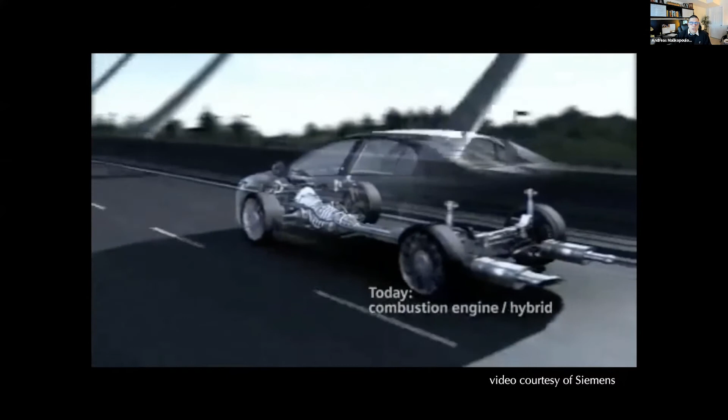We're about to depart from conventional vehicles with internal combustion engines and move on to pure electric vehicles. And this transformation creates several opportunities and challenges.

For example, we need to upgrade the existing infrastructure of our transportation network with fast chargers. We need to develop control technologies that can coordinate the increasing demand for electricity from the vehicles and reduce the load for the power grid.

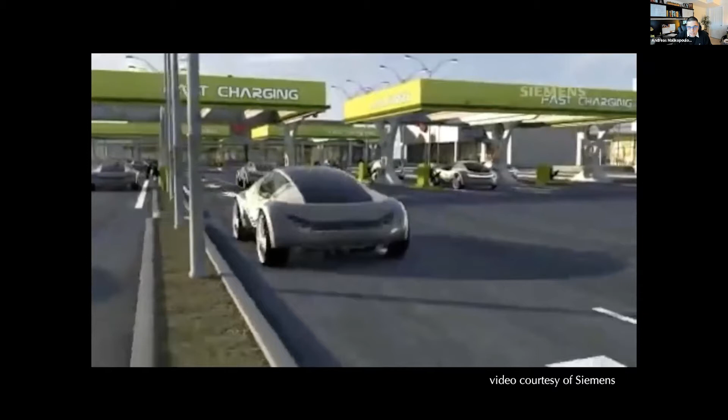We have opportunities to integrate electric vehicles with commercial and residential buildings and create eventually off-grid buildings. On top of that, with the introduction of connected and automated vehicles, we can use the shared information from the vehicles and infrastructure to improve transportation efficiency, reduce congestion, and stop-and-go driving.

So the common theme of these applications is that we use a cyber component, data or shared information, and we use this cyber component to control physical entities. In other words, we have typical cyber-physical systems.

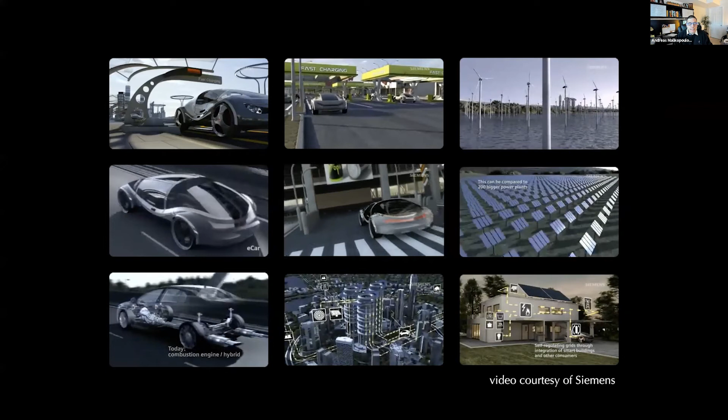Now, somebody might ask why we should be focusing so much on transportation. Well, in 2017, the United States consumed on average 19.96 million barrels of petroleum, and transportation accounted for 71% of that usage. That's enough fuel to fill up the Empire State Building over 2 times per day just to propel vehicles in the United States only.

So you can see the impact of transportation on a global basis on oil displacement and on the environment. With the introduction of connected automated vehicles, which are typical cyber-physical systems, we do have the opportunities to reduce oil displacement, improve transportation efficiency, improve the environment, at least reduce the impact on the environment, and eventually contribute to the health of the planet.

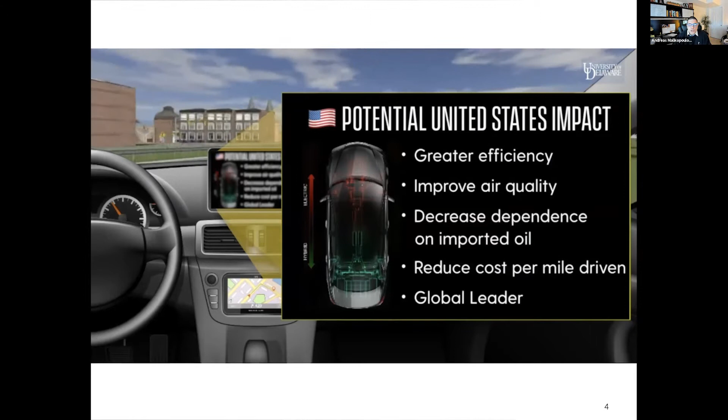So what I plan to do today is to focus on cyber-physical systems related to transportation. And then I'll go through several learning and optimal model-based control approaches that I have worked on over the last several years on emerging mobility systems.

So I'll show you how we can make the engines of vehicles learn how to improve their operation with respect to the driver's driving style. Then I'll talk about how we can develop model-based control approaches to coordinate connected automated vehicles. Through these applications, I will try to highlight some of the challenges that we can encounter using learning or model-based control approaches.

At the end, I will try to convince you that if we can separate what we can control and what we can learn, then we can combine both and address some of these challenges.

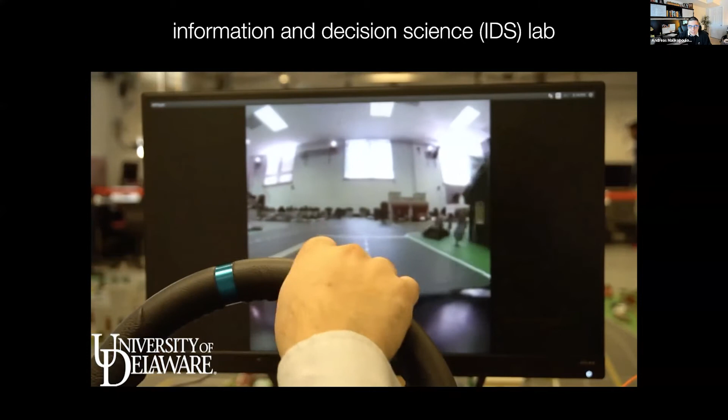We have also integrated driver emulators into our robotic cars, so we can drive them in our city. As you can see here, we have cameras ahead of the car so the student can drive and see what's going on through a monitor.

With this setting, we can have a mixed traffic environment with connected automated vehicles and human-driven vehicles, and then address the in-between and how we can influence human driving behavior through connectivity and automation.

Dealing with a physical city, we encounter several challenges every time. So we thought, why don't we build a digital replica to use in a simulation environment, test our algorithms there first, and then once they become mature, move on to the physical entity.

So we built a digital city, a replica of our scale city, and now we can also use this digital replica with our collaborators. It's available online, so they can test their algorithms, and once the algorithms become mature, they can come to UD and do some physical testing.

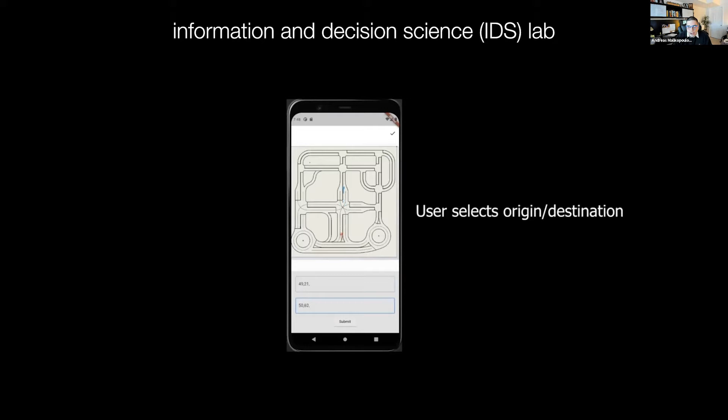More recently, we also developed an app to test shared mobility in our scale city. If somebody visits our lab, they can download this app and request any of the 50 robotic cars to take a ride, a free ride. We don't charge anything at the moment.

With this app, we can prove some concepts that we developed in optimization algorithms for eco-routing approaches, using the model of Uber and Lyft.

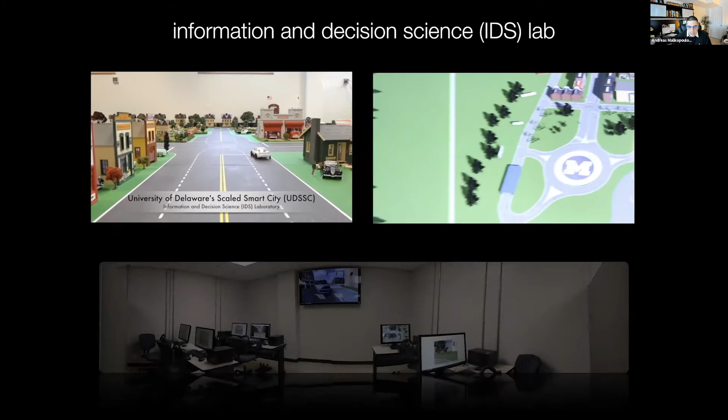We also have a driver simulation testbed that uses commercial software to do some simulations before we move to our scale city. So with this brief introduction, let me get back to our technical discussion.

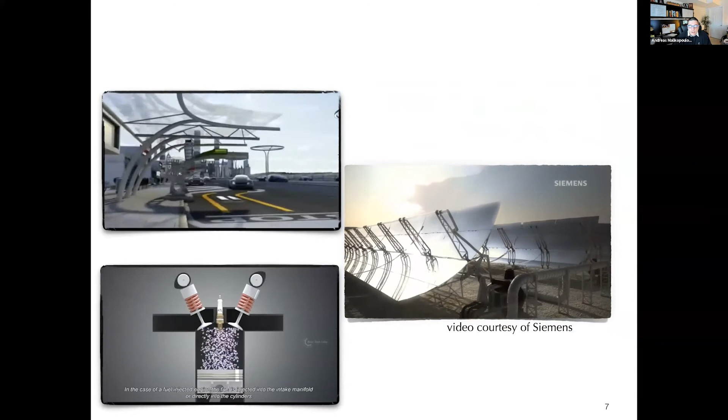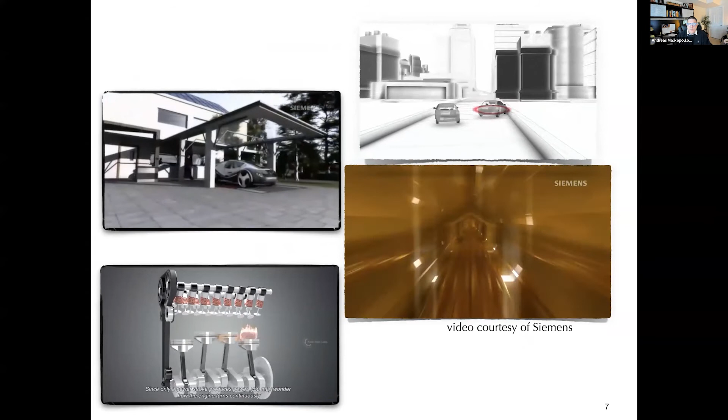As I said, over the years I have worked on several applications in transportation. I started with my dissertation, working on learning algorithms that can make the engine of a vehicle improve its performance while interacting with the driver. Then I moved on to plug-in and hybrid electric vehicles, developing power management control to maximize efficiency. Over the last several years, I've been working on connected automated vehicles and how we can use model-based control and shared information from vehicles to improve transportation efficiency and safety.

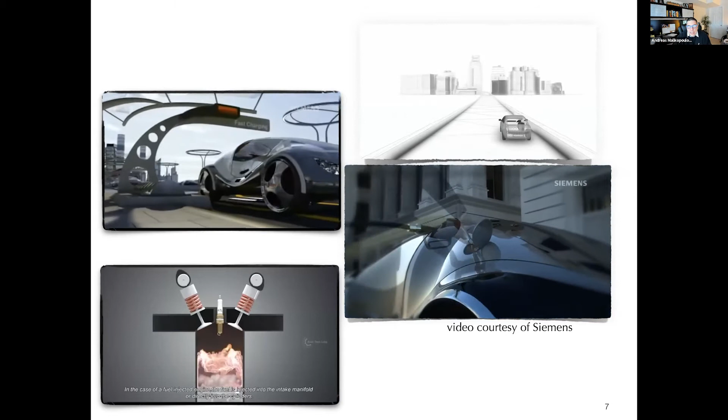So over the next several minutes, I'll tell you my story. I will start with my dissertation research on learning of the engine and go all the way up to today, highlighting all the challenges I've gone through over the years using either learning-based approaches or model-based control approaches.

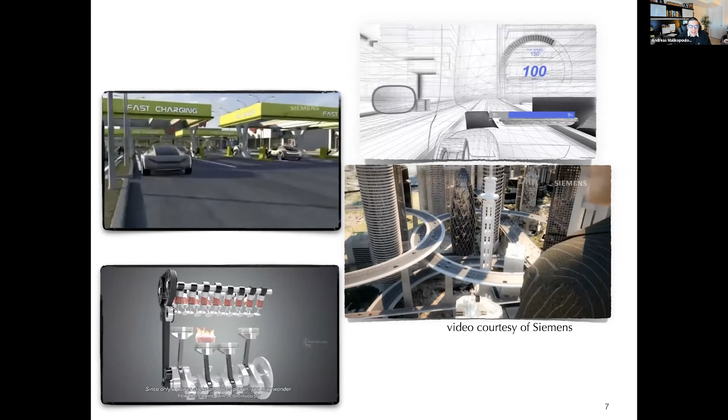I will use these lessons learned over the years to convince you that if we can separate learning and control, we might be better off. So the first chapter of my journey started in 2003, when I arrived in Ann Arbor, Michigan, starting in the winter semester.

So it was December of 2002, and it was about Michigan—Ann Arbor had about 11 inches of snow. So the first thing I had to do was buy long woolen socks. And the second thing I had to do was find a topic for my dissertation that would keep me busy over the next several years.

So I started reading some articles and going through different papers, and I realized there was a common question among several people at that time: they all wondered how we cannot achieve the miles per gallon posted on the window sticker. I thought this was a very interesting question that could keep me busy for the next five years, and I started digging into it.

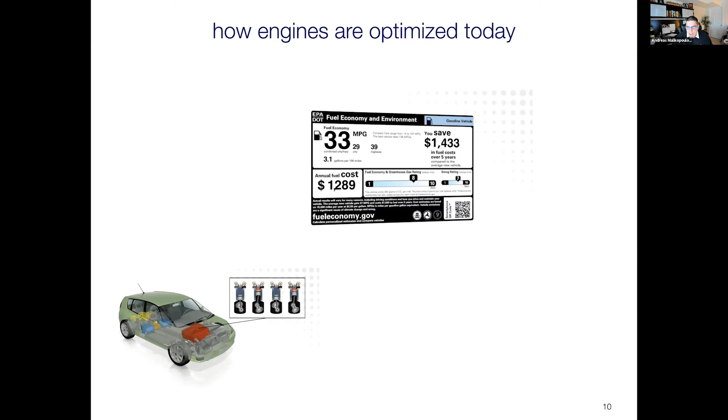So when we buy a vehicle in the US, it comes with a window sticker that gives us the fuel economy estimates for highway driving and city driving. And although we can always achieve the estimates corresponding to highway driving, we can barely achieve those fuel economy estimates for city driving. So let's see why we cannot get the fuel economy estimates when we drive in the city.

To understand engine operation, we need to look at the engine operation domain consisting of engine torque and speed, in conjunction with a brake-specific fuel consumption map, the BSFC map—those contours you see on the plot. The BSFC map gives you the fuel consumption per unit power. The lower the value, the better the fuel economy.

Now, the way OEMs optimize engines today: they take the engine operating domain and discretize it into a finite, usually small, number of steady-state operating points—meaning the engine operates at constant torque and constant speed. Then they compute the optimal values of the controllable variables that exist in the engine, like injection timing, spark timing, VGT, EGR, you name it, with respect to these steady-state operating points. Then they come up with a map and put it into the electronic control unit of the engine.

So as you drive your car and accelerate, as you can see at the top of the plot, the engine jumps from operating point to operating point on the BSFC map, and then interpolates the values of the controllable variables corresponding to the steady-state operating points to optimize the engine.

However, some of my colleagues at Michigan did experimental work at that time and discovered the following: if we operate the engine at constant torque and speed, fuel consumption is steady. This is why we can achieve the fuel economy estimates on highway driving, because on the highway we essentially operate the engine at constant torque and speed. This is also why it's always beneficial to operate your vehicle with cruise control.

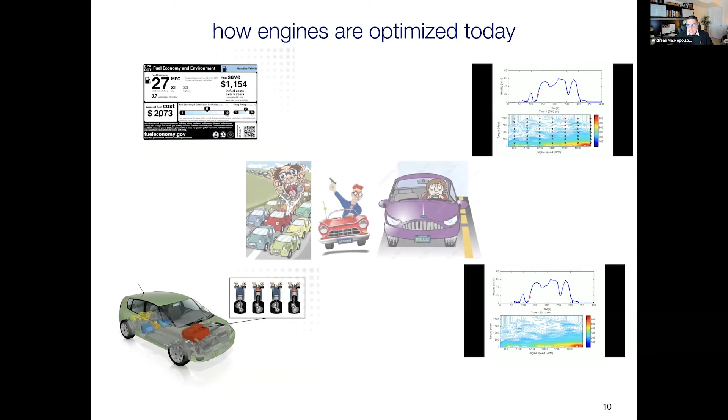Now, to optimize the engine over these transient periods a priori is infeasible, simply because every driver drives differently, so we have an infinite class of driving styles. So what I did in my dissertation was think: instead of focusing on the steady-state operating points, let me focus on the engine operating point transitions.

The natural model to capture this was the controlled Markov chain. So I modeled the engine operation, and the evolution of the operating points, as a controlled Markov chain. I developed a self-learning controller, learning the transition probability matrix and transition cost matrix. Then I formulated the stochastic optimal control problem and derived a look-ahead control policy in real time while the driver drives the vehicle.

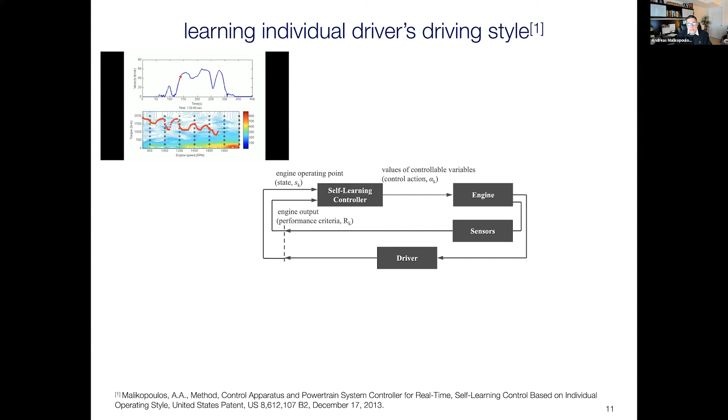So essentially, with this approach, the more you drive the car, the better the fuel economy becomes with respect to your driving style. We did several studies and simulation results, and showed that we can improve fuel economy by at least 8%, just by doing a better calibration of the engine using learning techniques.

I recently heard from the University of Michigan that they have ongoing discussions with a tech giant from Silicon Valley who are leaders in autonomous cars.

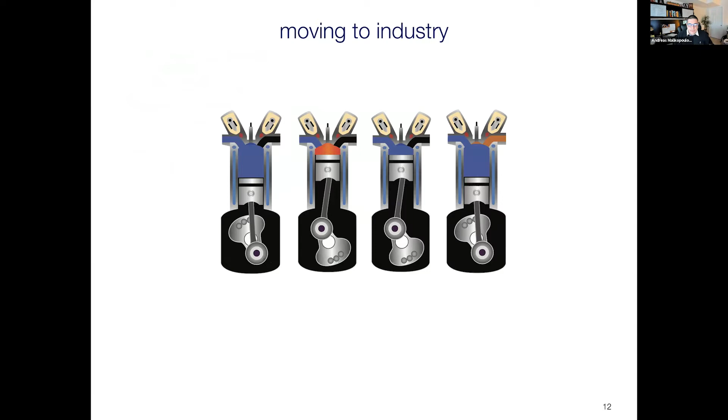So apparently they plan to license this technology and move it on to their own autonomous cars. This project attracted considerable attention at that time and had several discussions with the big three, GM, Chrysler, and Ford. So I eventually ended up working with GM R&D. That was my first job right after graduation.

So when I joined GM, they were working on a new combustion technology, and they wanted to depart from expensive piezoelectric fuel injectors and employ a simple and much less expensive solenoid fuel injector. But with a solenoid fuel injector, you have injector-to-injector variation.

These are four solenoid fuel injector characteristic curves, and you can see the deviation between injector to injector at two different cylinder pressures.

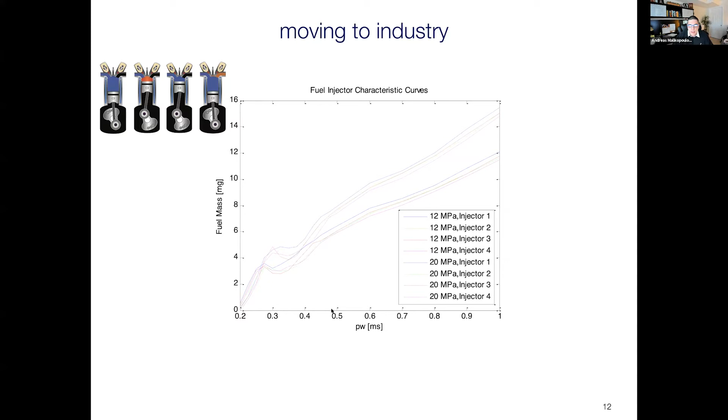So with that technology, we wanted to have precise injections at the small fuel mass, so multiple fuel injections essentially. We needed to make sure that we have very precise injections when we want to inject like 4 to 6 milligrams. So my job was to come up with a learning model that can learn this curve.

You might think that this is a kind of straightforward project. You can definitely get data and come up with a polynomial meta model that can give you this. However, the challenge in the engine is that I don't have measurement. I cannot measure the amount of fuel injected from the fuel injector.

So I had to combine several supervised learning techniques using data that I have offline from fuel injectors with real-time adaptive control in order to learn the fuel injector characteristic curve in real time in a few cycles.

So with this approach, essentially, I was able to learn the curves for small injections with just a few cycles, which means in a few milliseconds. On top of that, the scheme was able to essentially also capture the day-to-day variation due to the environmental conditions. So that was another project that I used learning techniques, a combination of learning and adaptive control techniques.

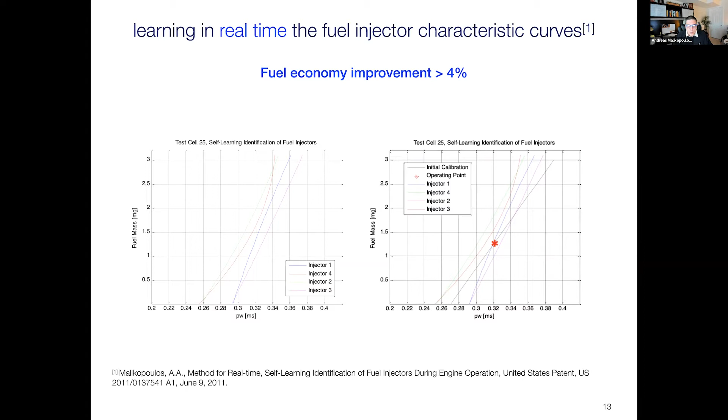And this approach resulted in about 4% improvement in fuel consumption, which is quite significant for engines. So that was around 2010.

And then we have the 2010 volcano eruption in Iceland. And you might wonder, how is this related to this discussion? Well, believe it or not, this volcano eruption changed my career path and also the research direction.

In 2010, I was invited to participate in the 2010 German-American Frontiers Symposium hosted by National Academy of Engineering. And due to the volcano eruption, several speakers from Germany could not make it to the US. That was hosted by Oak Ridge National Lab in Tennessee.

So the organizers asked me to give a seminar, and there were several folks from Oak Ridge in the audience. One thing led to another, and I ended up working for Oak Ridge National Lab and moving on to hybrid electric vehicles and plug-in electric vehicles on my research.

So when I joined Oak Ridge, my first project was to develop an optimal power management control algorithm that can maximize the efficiency of hybrid and plug-in hybrid electric vehicles. So let's see what is a hybrid electric vehicle.

In a hybrid electric vehicle, in addition to the engine, we have a motor, generator, and battery that can power the vehicle either separately or in combination. So essentially, with the hybrid electric vehicles, we can deliver the power demanded by the drivers either through the engine or through the motor, or by combining engine and the motor.

When we use the motor, we deplete the battery. So we need to make the engine operate the generator and charge the battery. So there is a lot of decision-making process going on while the driver drives the vehicle.

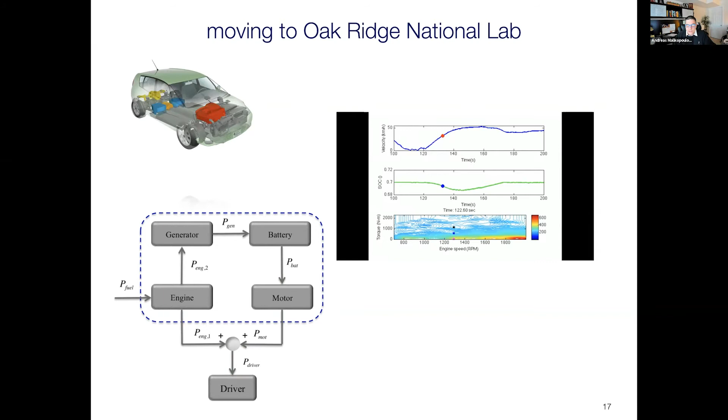And just to give you a flavor of this problem, the first thing that we need to do is to identify the feasible state and control action pairs for each of the subsystems: engine, motor, generator, and the battery. And then we formulate an optimal control problem when we want to maximize the efficiency of the entire system or minimize the cost of the entire system.

And we use the long-run average cost per unit time just because we want to optimize the operation of the hybrid electric vehicle in the long term, as the driver drives the vehicle for days or for months.

Now, to solve this problem, there are two major challenges. First, you can't really solve this problem on board the vehicle. On a commercial vehicle, you can barely inverse a 4x4 matrix. You don't have the computational power to do that.

The second challenge is that even if you solve this problem, the optimal control strategy will be optimal for one driver only.

If any other driver drives the vehicle, then you have different results. So to address these problems, I reformulated the problem.

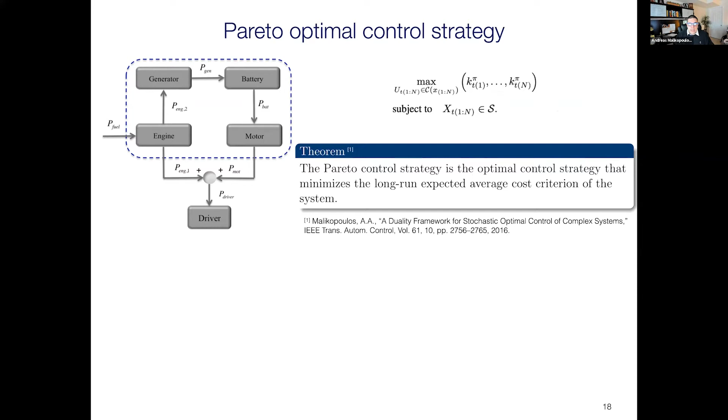I reformulated the problem as a multi-objective maximization problem, where I was trying to maximize the efficiency of the engine, motor, generator, and the battery. Then I solved this problem offline for every different realization of the state of the system, and I computed the Pareto optimal point for each of these different realizations. Then I came up with a map and operated the vehicle using this map, interpolating this value, essentially operating the system under this Pareto optimal point every time.

I showed that if you construct this Pareto control strategy, as I call it, then this is equivalent to the optimal control strategy that can minimize the long run expected average cost criterion.

I did several simulations to prove these concepts. To solve this and derive the dynamic programming solution, I used Q-learning. I had the model of a hybrid electric vehicle, and I ran it over the same driving cycle again and again using Q-learning.

Once I learned the optimal control strategy, I compared it with the Pareto control strategy that I was able to derive in real time, and I saw that I got the same results.

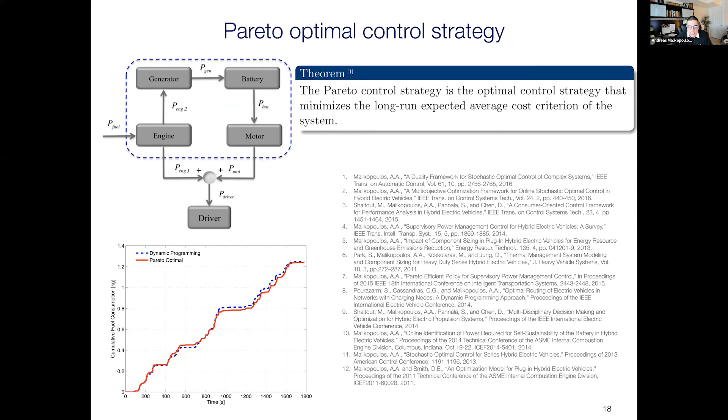More recently, we applied this approach, developed several years ago, in an ARPA NextCar project, which I'll talk about in detail. We had an Audi A3 plug-in hybrid electric vehicle, and the idea was to improve its efficiency. We used this approach and showed we can have at least 12% improvement over the Audi's power controller.

Our industrial partner, Bosch, got really surprised with this result - it seemed too good to be true. So they did a statistical analysis, comparing the engine operating points from the Audi's controller with the engine operating points from the Pareto optimal solution, and showed that statistically, we operate the engine in the more efficient BSFC regimes.

We talked about the BSFC earlier on - it's the fuel consumption per unit power. That was the reason we got these significant improvements.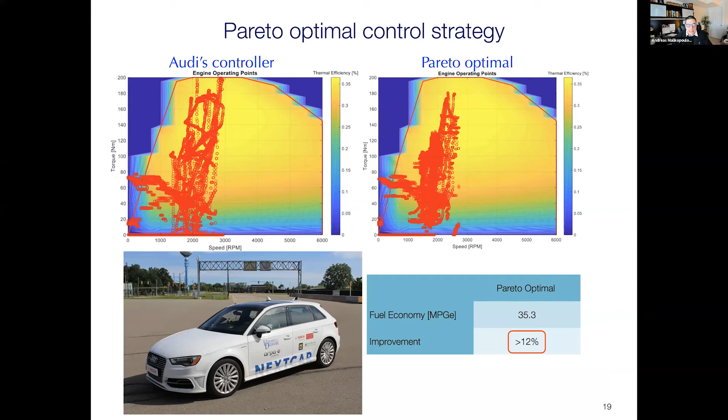That was the second stage of my career, working on hybrid electric vehicles and plug-in hybrid electric vehicles, still at Oak Ridge. At that time, I saw opportunities with connected automated vehicles. I thought that using shared information from vehicles, we can essentially take this information and optimize the powertrain or optimize energy, the transportation efficiency.

Essentially, what I had in mind was how we can use this information to coordinate vehicles at intersections, merging roadways, and avoid stop-and-go driving, then have benefits in energy indirectly.

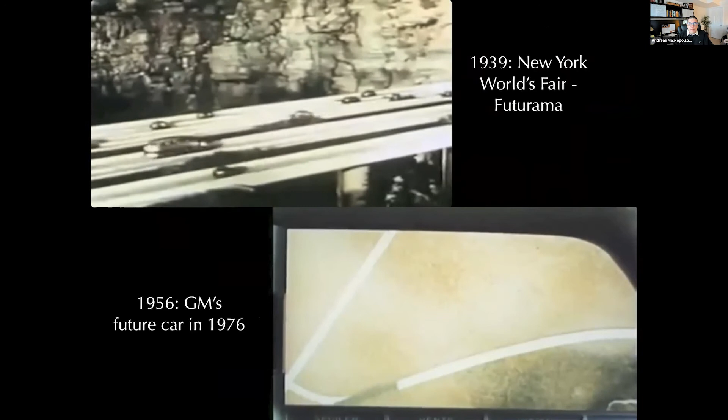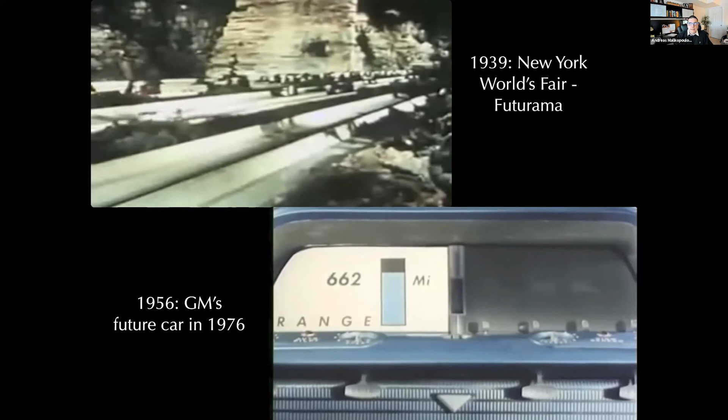If you think about it, these are not new ideas. The first time automation sort of appeared in the community was in 1939, in the Futurama, where they had a model of the world into the future. A big sector of this model was devoted to transportation, and they envisioned a fully automated highway system with cars. Imagine in 1939 having a vision like this.

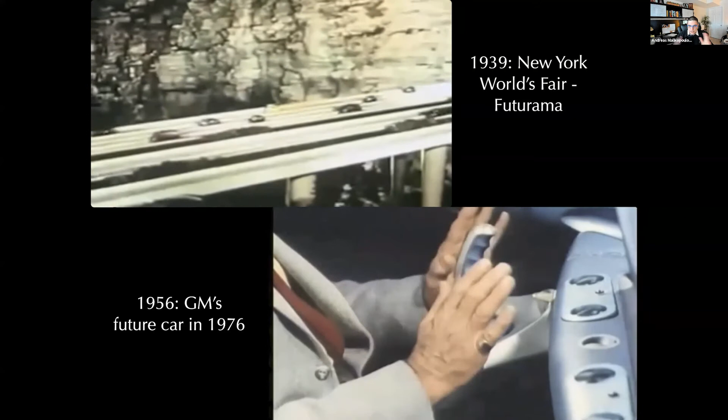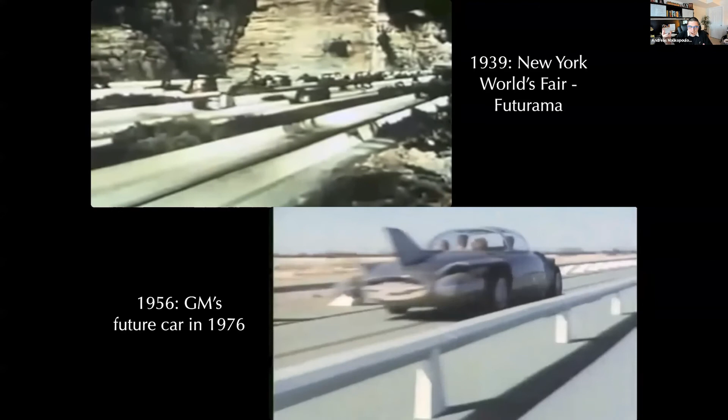In 1956, GM featured another car 20 years into the future, showcasing the first concept of a self-driving car. They had a family driving to Chicago, envisioning a fully autonomous car, and while the car drives on its own, the family enjoys a bunch of luxury stuff - the dad fires up a cigar, they have ice cream and drinks in the car. That was showcasing the potential impact of cars driving on their own.

So these are not new ideas. The fact that over the last 83 years we still haven't been able to get there speaks to how hard this problem is.

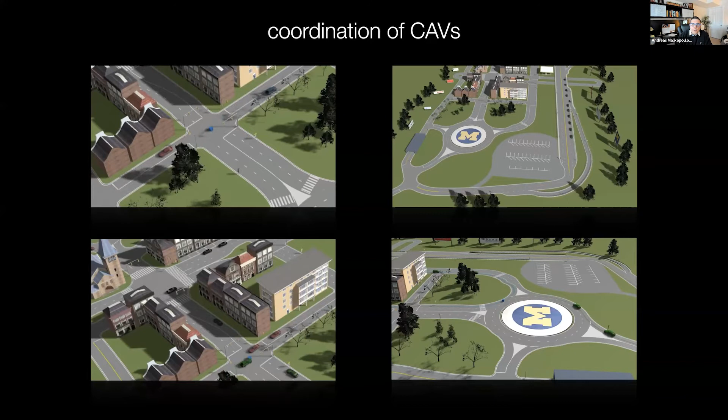So long story short, over the last several years we developed control algorithms that can use the shared information from vehicles and coordinate them in intersections, in merging roadways, in roundabouts, and improve transportation efficiency. Let me take the next several minutes to give you a flavor of how we can model this problem and address it.

I'm going to use an intersection as a reference, but this approach can be used for any transportation or traffic scenario, like merging roadways, roundabouts, you name it. So let's assume we have 4 connected automated vehicles approaching an intersection without traffic lights. If the vehicles keep cruising, they will potentially have a conflict.

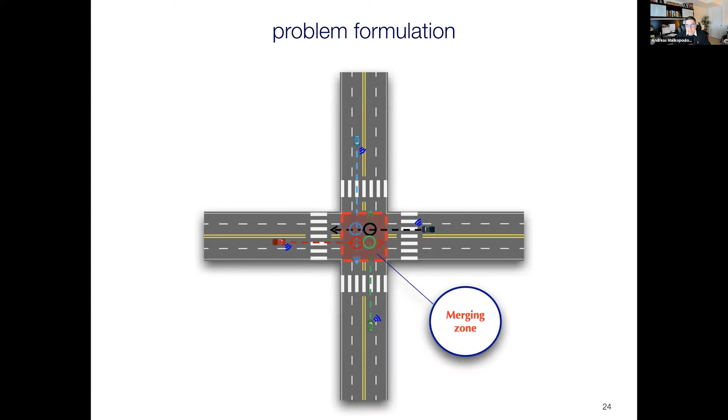The area at the center of the intersection where vehicles can have a potential conflict is called the merging zone. We then define the control zone, which is outside the merging zone, and this is the area where vehicles can communicate with each other and exchange information.

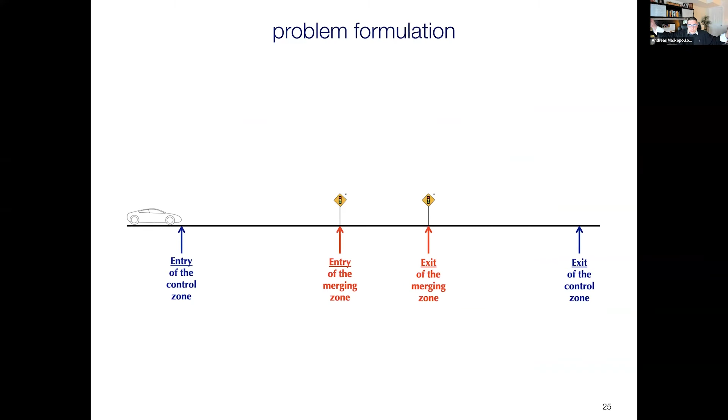So the problem here is once the vehicles enter the control zone, they need to exchange information and coordinate so that they can cross the intersection without stop-and-go driving and without collision. The idea is that once the vehicle enters the control zone, first identify the time it will enter the merging zone, the time it will exit the merging zone, and the time it will exit the control zone. Once the vehicle identifies these times, the next task is to derive its optimal acceleration and deceleration in terms of fuel consumption so it can cross the intersection.

So if you think about it, we address two problems. In the upper level problem, we identify the times for the vehicles to cross the intersection, and this is essentially a throughput maximization problem. In the lower level problem, we derive the optimal acceleration of the vehicle for these times, which will minimize the energy consumption of each vehicle.

So now what I'm going to do in the next few minutes is start with the analytical solution of the low-level problem and show you how we can use this solution to formulate a new problem that can solve both problems at the same time. Why do we need to do that? The reason is that the low-level solution can become very tedious because it's a constrained optimization problem, so tedious that you cannot really solve it online on board the vehicle. So we need to bypass this and have the same solution but with a different approach.

In our exposition, we model each vehicle as a double integrator. P is the position of the vehicle starting at the entry of the control zone. V is the speed of the vehicle. U is the control input, acceleration or deceleration. And then we add the distance S_i, which is the distance of each vehicle i from the preceding vehicle k. This corresponds to the proximity sensor of the vehicle, which measures the distance from your preceding vehicle.

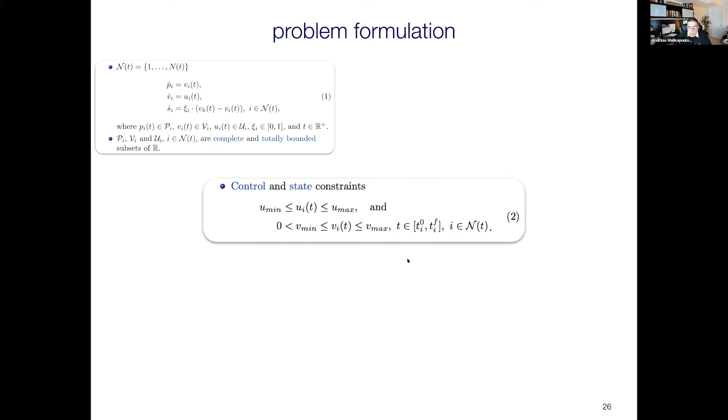Then the next step is to identify the bounds of my control input and my state. For example, each vehicle has a maximum acceleration and deceleration capability, and we need to incorporate this into our modeling framework. For each time T_i0 that the vehicle enters the control zone until the time T_if that the vehicle exits the control zone, we impose a speed limit within the control zone for each vehicle. Then we need to make sure that we satisfy safety constraints.

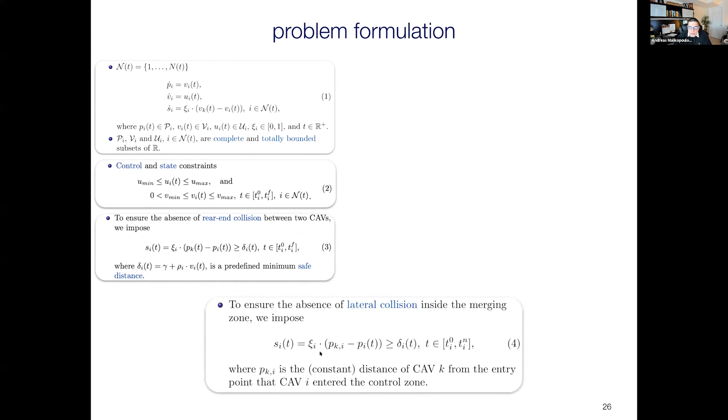The first safety constraint is the rear-end collision constraint, where we require that the distance of each vehicle i from the preceding vehicle k is always bigger than or equal to a safe distance delta_i, which is also a function of speed, in the sense that the higher the speed, the higher the distance we need to maintain from the preceding vehicle. Finally, we make sure that we don't have a lateral collision inside the merging zone.

Once we get this done, the next step is to formulate our problem, which is minimizing the optimal L2 norm of the control input of the vehicle from T_i0, when the vehicle enters the control zone, until T_if, when the vehicle exits the control zone, subject to all the boundary conditions, dynamics, and the safety, state and control constraints.

Now, somebody might argue here and say, hey, you told us that you're going to minimize energy consumption, but you're minimizing the L2 norm of the control input. How are these two related? Well, if you remember from the first part of the talk, by minimizing transient engine operation, essentially we minimize fuel consumption. So this is essentially what we're trying to do here. We're trying to minimize transient engine operation and give the desired speed to the driver with minimal acceleration, minimal deceleration. So this is how we can get indirect benefits in fuel consumption.

Now, to solve this problem, we can use Hamiltonian analysis. And if none of the state, control, or safety constraints become active, then we have a very nice closed form analytical solution where the optimal control input is a linear and affine polynomial function with respect to t. The optimal speed of the vehicle is a nice quadratic polynomial function, and the optimal position of the vehicle is a cubic polynomial function of time. Now, A, C, D, and E are constants of integration that can be computed easily from the initial and final conditions.

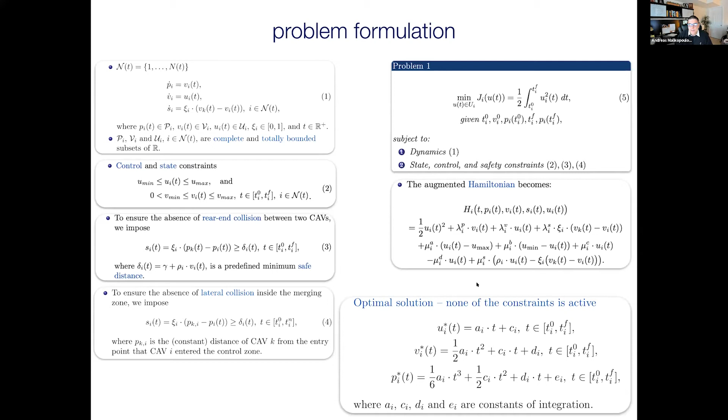However, if any of the state, control, or safety constraints become active, then things get complicated. Just to outline the idea of this complication, let's assume that none of the constraints become active from the time TI naught, when the vehicle enters the control zone, until the time TIF, when the vehicle exits the control zone. In this case, we have the very nice closed form analytical solution that I just showed you before, which can be implemented in real time on board the vehicle.

However, if any of the state, control, or safety constraints become active, then what we need to do is piece the unconstrained and constrained arcs together to satisfy the Euler-Lagrange equations along with the boundary conditions of the system. And then we end up with a set of algebraic nonlinear equations that we can solve on board the vehicle to find the junction points T1 and T2 along with the constants of integration.

Essentially, this implies that we can no longer hope for any closed form analytical solution. We seek numerical solutions like steepest descent and so forth, which means that we cannot really solve this problem on board the vehicle. And even if we get a solution, another constraint might become active, so we need to repeat this process again.

Just to give you a flavor of the complexity, let's consider that we have the rear-end safety constraint, Ni of t, x of t. If this becomes active, it causes discontinuities in the influence function of my Hamiltonian analysis, which means that to address these discontinuities, I need to adjoin the partial derivative of my rear-end safety constraint with respect to the state of the system by a set of Lagrange multipliers and come up with a system of nonlinear algebraic equations that I need to solve simultaneously. So this is impossible to solve on board the vehicle.

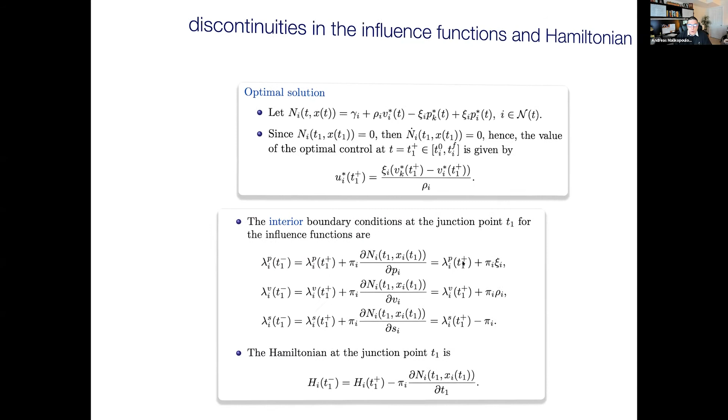Essentially, the idea is that if I can have my optimal unconstrained solution, which is a nice closed form analytical solution, without activating any of the state, control, or safety constraints, I would be happy, because I can solve this problem online. So how can I get this solution eventually?

First of all, we start with a cubic polynomial of the unconstrained case. This is a nice polynomial that we can get if none of the state, control, or safety constraints become active. Now, this polynomial is active between Ti naught and TIF, which means from the time that the vehicle enters the control zone until the time the vehicle exits the control zone.

Now, if you observe this polynomial, we can make three observations. First, this is a real valued function. Second, this is differentiable. And third, this is strictly increasing, which means that this is a one-to-one function, which means that the inverse of this function exists. We call it the inverse time trajectory of the system. To compute the inverse of this cubic polynomial, you can use Cardano's method. This is a pretty straightforward way to find the inverse function. Now, if you look at the time trajectory, this is the inverse of this polynomial.

The time trajectory gives you the position of the vehicle within the control zone at different times. If we evaluate this time trajectory at the exit of the control zone, then I end up with a function with respect to phi, and I can use the phi's to change the shape of my time trajectory, which means I can use the phi's to minimize the time that my vehicle exits the control zone.

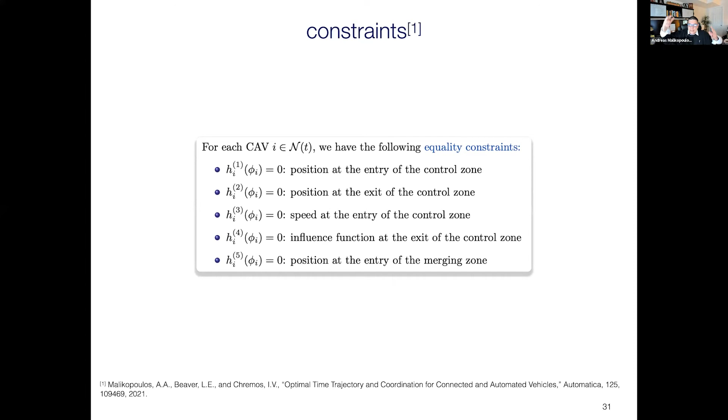At the same time, I don't want to activate any of the state and control constraints. So when I derive this time trajectory, I don't want to activate my maximum and minimum speed limits or the maximum and minimum control inputs, and I want to make sure I do not activate any of the safety constraints.

Given this framework, I can formulate my problem as minimizing the time trajectory of the vehicle evaluated at the exit of the control zone, subject to my initial and final conditions and all my inequality constraints. At the same time, I allow my vehicle to explore other lanes by creating the occupancy set of each lane and making sure I don't have any conflicts in any other lane.

Now, to solve this problem, the question is, can I solve it in real time? It turns out that the objective function, the time trajectory evaluated at the exit of the control zone, is a convex function, and all the equality and inequality constraints are affine convex functions. This means that if I apply Slater's condition, I can show there is no duality gap in this problem formulation, which means we can solve this problem in real time.

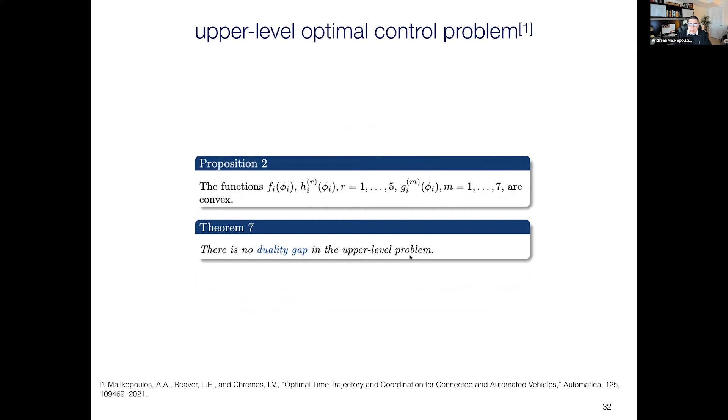So just to give you a flavor of the results of this framework, we have applied this and variations of it in different scenarios. This is one of the examples we use in our scale city. You can see the cars trying to cross the intersection without stop-and-go driving, by deriving the optimal control input at the entry of the control zone.

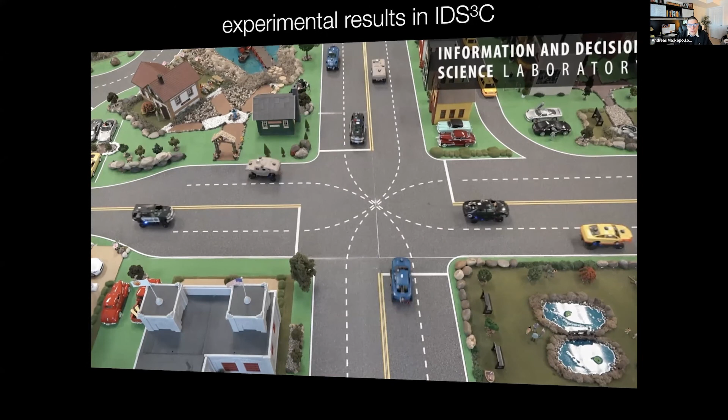We have also implemented this in a corridor, including an intersection, merging roadway, and roundabout. You can see how the cars, by the time they get into the control zone, derive the optimal control input, and they can cross all these conflict points without stop-and-go driving.

We also implemented this in our demo vehicle. This is, as I said before, an ARPA-E project, Next Car. We completed this program last December. The objective was to use connectivity and automation to improve the efficiency of the Audi by 20%. The project was led by University of Delaware in collaboration with Bosch, Boston University, University of Michigan, and Oak Ridge National Lab. We did several field testing in M-City at the University of Michigan.

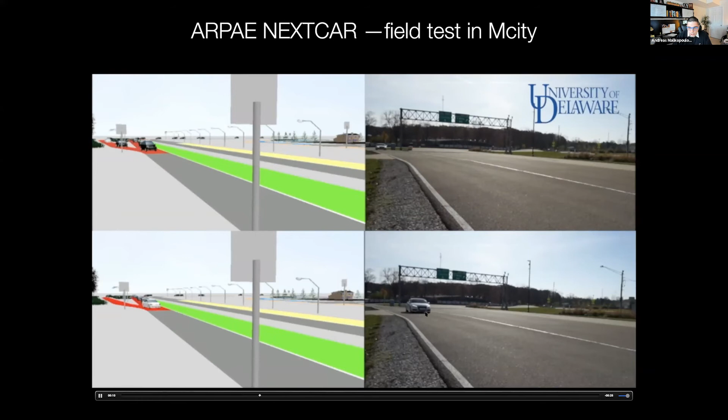What you will see here is the Audi in the field in M-City, interacting with a bunch of virtual vehicles - those are the black vehicles you can see on the left. On the top is the baseline scenario without connectivity and automation. On the bottom is the scenario with connectivity and automation. As the Audi approaches the merging zone, it coordinates with the other virtual vehicles and gets into the merging zone without stop-and-go driving. On the top, in the baseline scenario, the Audi has a virtual vehicle ahead, so it has to wait until that vehicle departs in order to get into the merging zone. This is the typical scenario we encounter today when we have a ramp or a yield sign. So now the Audi can get into the merging zone.

We also did several vehicle-in-the-loop testing at Bosch Farmington Hills facilities with our collaborators. We essentially put the car on a chassis dyno, and the car drove through a virtual environment interacting with other vehicles. On the left is the baseline scenario without connectivity and automation. On the right is the scenario when all the cars are connected and automated. You can see how we smoothed out the speed profile of the vehicle since we eliminated the stop-and-go driving. Now we have stretched the speed profile essentially into freeway driving. So the Audi, when it arrives in the merging roadway, can coordinate and cross the merging roadway, and so forth. This smoothing out of the speed profile resulted in benefits ranging from 14% all the way to 35% improvement.

So just to summarize what we've discussed so far: we talked about model-based control approaches, and showed that we cannot always facilitate optimal solutions with performance guarantees, because of the discrepancy between the model and the actual system. Recall, I used the double integrator model to capture the dynamics of these vehicles, and then I had to use a PID controller to capture this discrepancy. In supervised learning, on the other hand, you cannot always facilitate robust solutions with performance guarantees using offline data only. When I worked with a fuel injector characteristic curve, I had to combine offline data with real-time control in order to address this drawback.

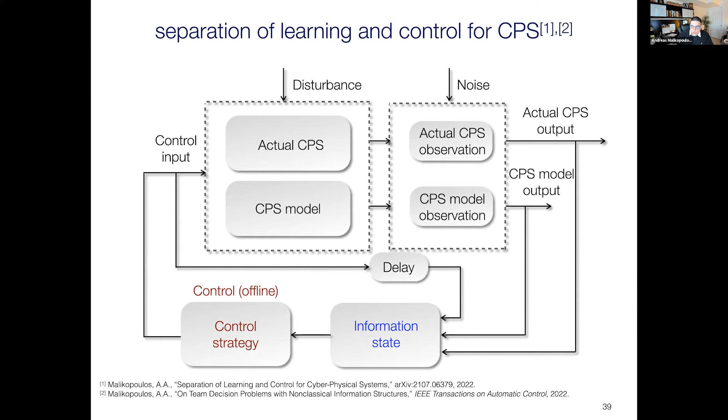So if I use this information state offline to derive an optimal control strategy using only the model I have available, I won't have the information of my actual CPS. This means I'm going to parameterize the control strategy I derive offline with respect to the different realizations of the state of my actual CPS.

What's the idea here? Once I use my model to derive the optimal control strategy using the information state, I need to parameterize my optimal control strategy with respect to the realization of the state of my actual CPS. Then I go back to my initial system and apply this control strategy to my actual CPS and CPS model, and as I start collecting data, I'm learning the information state.

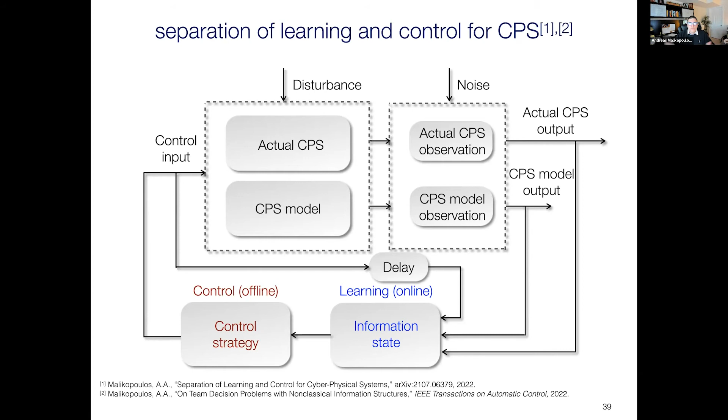What I'm going to show you in a while is that once we learn the information state online, the optimal control strategy we derived offline becomes optimal for the actual CPS. Now let's get into more technical details to see this concept.

Let's assume we have an actual CPS, a cyber-physical system with decentralized information structure, meaning we have a system of systems. For example, imagine a fleet, a number of connected automated vehicles trying to cross the intersection. XT hat is the state of the system, WT is the disturbance, and UTK is the control of each of the subsystems.

UTK is the control input of each individual vehicle, acceleration or deceleration. XT is the state of my system, position of the vehicle, and speed. XT hat and WT are random variables defined in an appropriate probability space.

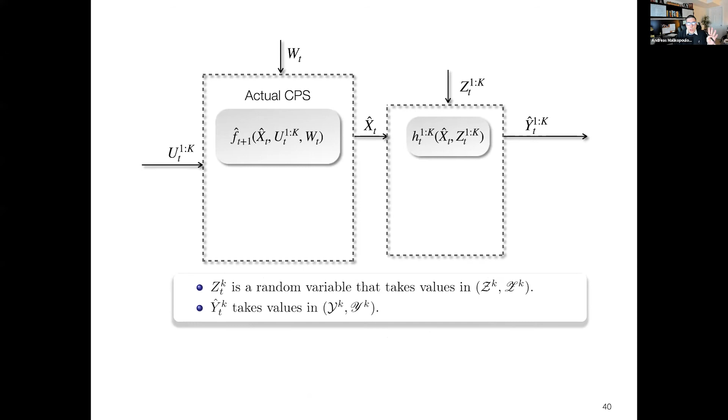For each of these subsystems, we have a noisy observation. Imagine every single CAV can observe the state of the system with some noise, because there's noise when measuring the distance from the preceding vehicle, or error in the information about the position of other vehicles, and so on. Now we have the actual CPS, and the problem is to minimize the expected total cost of this system.

In this cost we have CT, some measurable cost functions. Imagine this is the travel time of each of these vehicles, or fuel consumption, or a combination. Now, to solve this problem, as we discussed in the last chapter with connected automated vehicles, we can't really do that.

Because we don't have the model - we don't know the dynamics of our actual vehicles, so we will use models. We use the double integrator to do that. So we assume we also have the double integrators, the CPS model, and we operate the actual CPS, the actual vehicles, and the double integrator models at the same time.

Then the idea here is to establish a new information state for this system. This information state is the joint probability distribution of XT, the state of my model, and the state of my actual CPS, given all the data of my model, which is the information structure of the model.

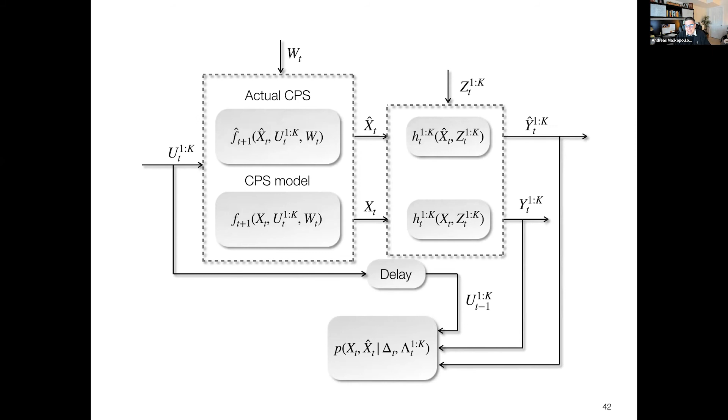Now what is delta t? What is the information structure of the model, delta t and lambda t? Remember I mentioned this is a decentralized system with a decentralized information structure, which means there is an n-step delay information.

For example, if any of these subsystems has an observation or an action, this observation and action becomes known to any other system after n time steps. So there's some delay, and this is typical in emerging mobility systems or other CPS applications. For example, in cars, when we exchange information, there's some delay between this information.

So delta t is the common information among all the subsystems, all the vehicles, and lambda TK is the private information of each of these vehicles. Delta t and lambda t together form the information structure of my system.

So I'm going to use this information state and go offline, pick up the model I have, and solve this problem offline to derive the optimal control strategy. Since this information state is a function of the state of my actual CPS, and I do this offline, I don't have any information about my actual state, which means when I derive the control strategy offline, it will be parameterized with respect to any realization of the state of my actual CPS.

Now, if we take a step back for a moment and think about what I have done so far, there's nothing new.

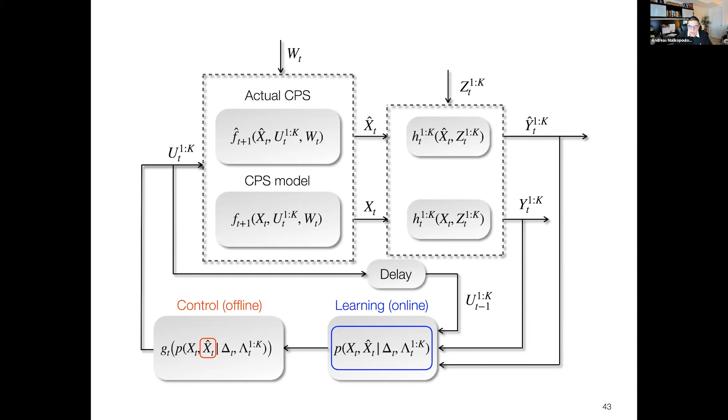However, before I show you this result, I need to make sure I can separate my control and learning, so the information state does not depend on the control strategy. The first result shows that the joint probability distribution of the state of my model and the actual state, given all the data, is indeed an information state, the evolution of which does not depend on the control strategy.

It means that every time my information state evolves, this does not depend on the choice of the control strategy, but on the realization of the random variables of my system, which implies that I can separate my state estimation from my control design.

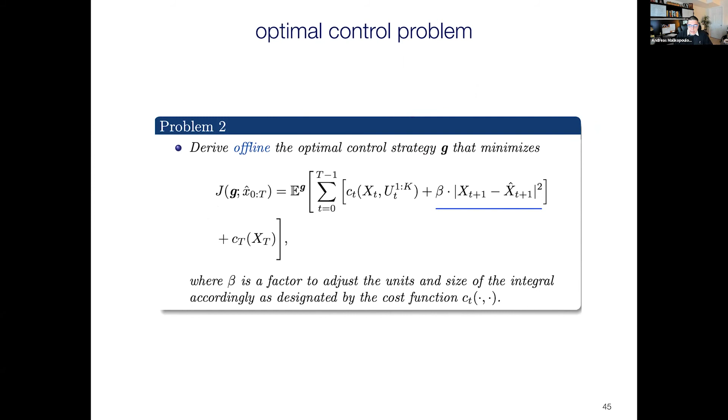Using these results, I can go back to the problem I wanted to solve at the beginning: minimize the expected total cost of the actual CPS. Instead, using my new information state, I solve a problem where I've added a penalty function for any discrepancy between the state of my model and the state of my actual CPS. The following result says that once I solve this problem, the optimal control strategy is also optimal for my initial problem of my actual CPS.

Just to give you the intuition, not going through the proof, we solve this problem offline using the information state of my system. When I solve this, for each realization of the state of my model, I derive an optimal control action parameterized with respect to different realizations of the state of my actual CPS. So instead of having a single value of the control action UT, I have a vector of values corresponding to different realizations of my actual CPS.

Now, when I apply this to my actual CPS and the model, and start learning the information state, once I learn it, I'm picking control actions that yield realizations of my actual CPS that minimize this cost. Eventually, the two control strategies become the same.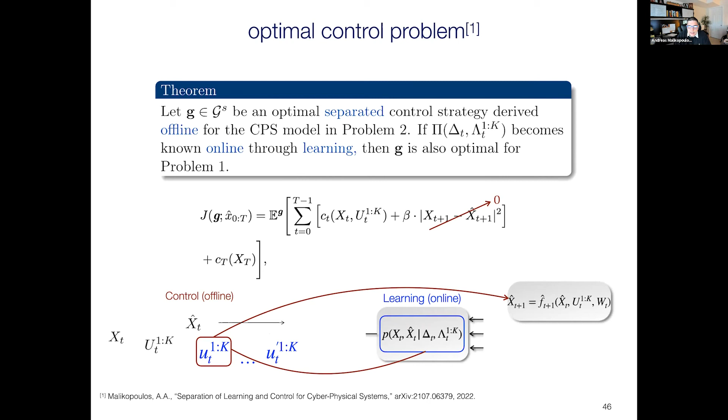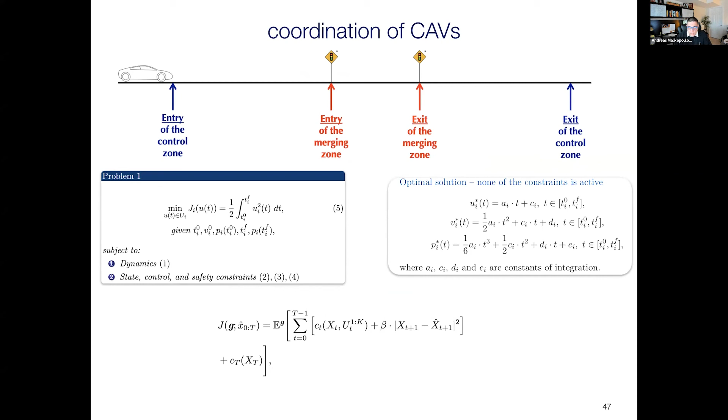As we speak, we are applying this framework to the problem of coordination of vehicles in specific scenarios. If you remember, that was the initial cost function I wanted to use, and it resulted in a nice closed form analytical solution. What we're trying to do now is enhance this initial problem with a new cost function and come up with a parameterized control strategy that we can learn online.

We hope this approach can be applied to several CPS applications with a decentralized information structure, where a large volume of data is added to the system gradually rather than altogether in advance. In these particular problems, we face several challenges using either learning or model-based control approaches, so we believe this approach can help bridge this gap.

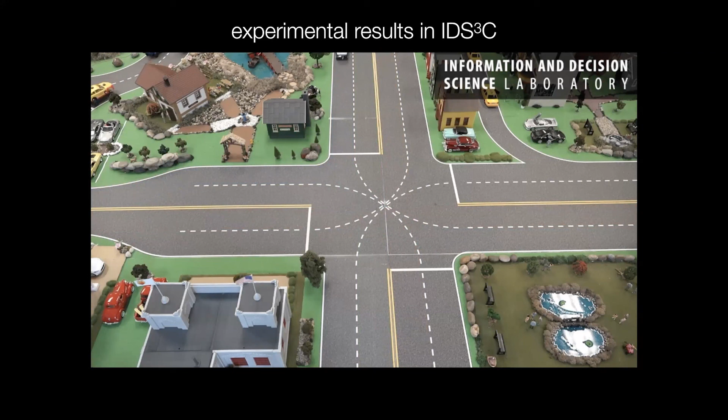Since we have no other question yet here, I would like to ask one question, Andreas. This is a little bit a high-level question, and I think you can elaborate here a little bit more. So you showed that we can solve the intersection with low energy and with high throughput, right?

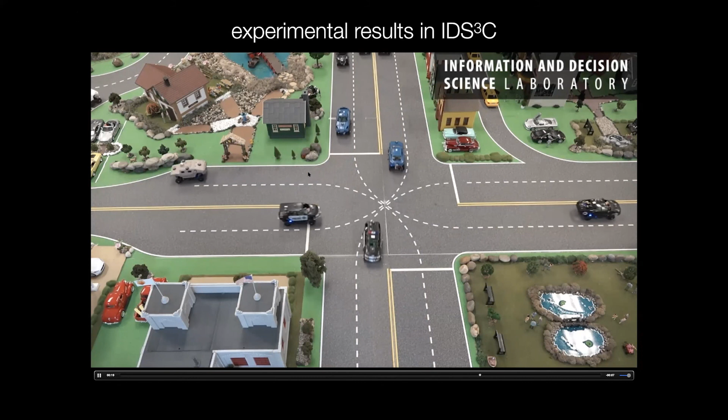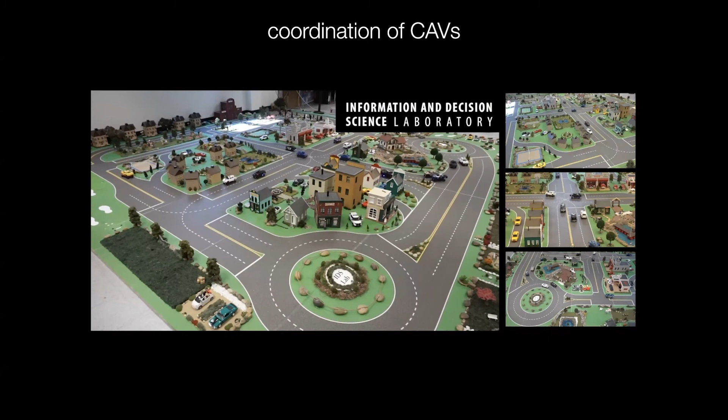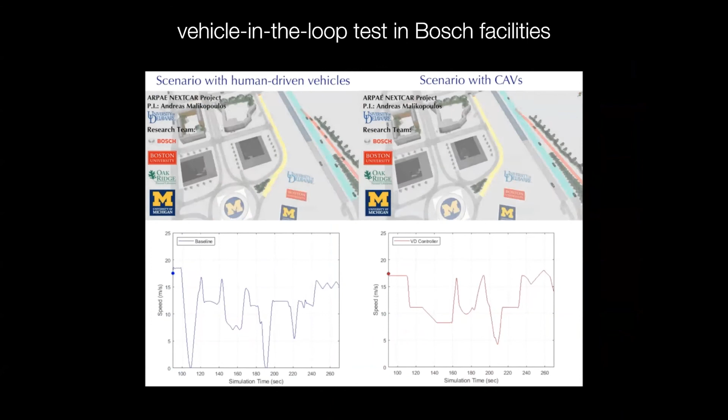And in the future, actually what we see here in the setup, we have a lot of autonomous cars, and the development right now of autonomous cars like perception, planning, control to make the cars drive completely free without any high level steering or something like that. So when you look at your research and you showed us the controller you created, can you elaborate where the most impact comes from? Is it the path that the car is then planning? Is it the velocity that the car is planning? Is it the final controller, the overall controller setup? Or is it even the behavior the car is planning? Right? So perhaps just elaborate a little bit more where you think finally it comes down to this point where you figured out in your research that creates the impact?

Great question. Thank you for asking this question. You are absolutely correct. We dig into this question for quite some time to understand where these benefits are coming from.

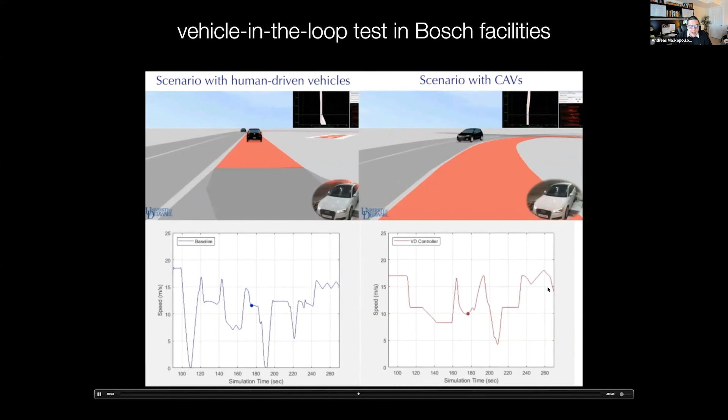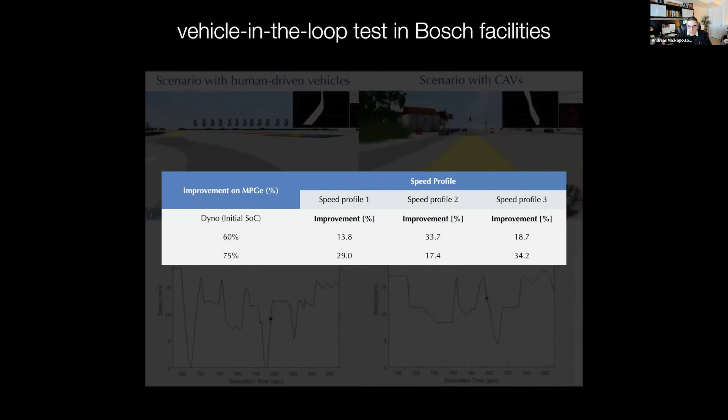Yeah, and to help me answer this question, I'm showing you this video. On the left, this is the baseline scenario, what we have today in our transportation network: no connectivity, no automation. And then we have to stop on stop signs, on traffic signals, on merging roadways. This is the speed profile of the vehicle with stop and go driving. On the right, this is the utopian scenario, something that I think we're going to have to wait until we see it realized in our transportation network. But you can see how we have smoothed out the speed profile. And given this, we have benefits ranging from 13 all the way to 34%.

So I wonder, where are these benefits coming from? I did a very simple exercise. I went to my car and I checked the window sticker of my car, and it says you have 35 miles per gallon for highway driving and 27 miles per gallon for city driving. And I compared the difference. This is about the same range, 25 to 35%. If you do the same exercise for your car, you will see the difference is about that range. It means that once you stretch the speed profile of the vehicle and make it freeway driving, this is where all the benefits are coming from.

Of course, in this particular ARPAE project, we also did powertrain optimization. So on top of the communication and smoothing out the traffic flow, we did better power management control on the powertrain of the vehicle, and we were able to get about 12% improvement. This is in addition, but the majority of the benefits is coming from smoothing out the traffic, the speed profile of the vehicle. If ideally we could leave home and go to our final destination without stop and go driving, without coming to a full stop whatsoever, that would be the ideal scenario.

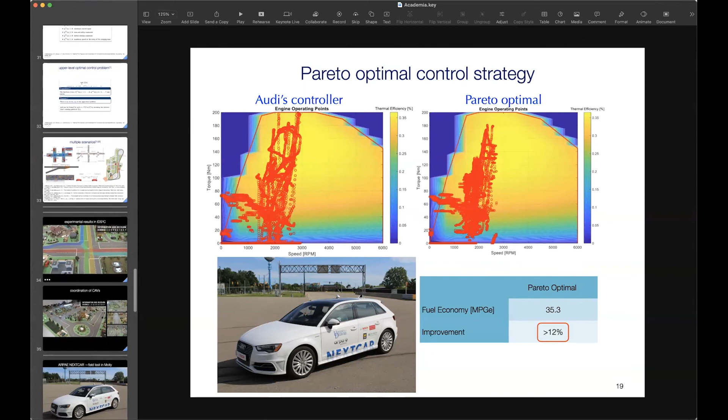I'm not sure if I answered your question. No, you answered it perfectly, because that's what in my research, I did some energy optimization too. And that's also what I figured out. I think what we underestimate right now in autonomous driving development and software development is exactly this, because that's where you get the impact afterwards.

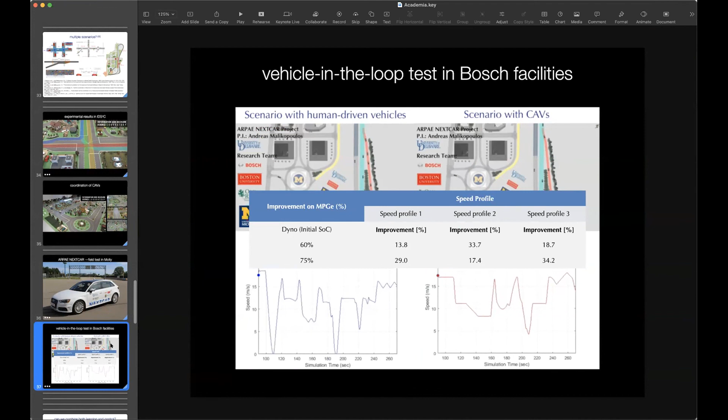Let's talk about some application point of view. You tested everything on a car, and you also told us before that we cannot solve this problem on the car because we don't have the computation power. So when you solved the problem, what kind of computer did you use, and what was the calculation time of solving this problem? Just to give us some numbers and ideas of what we are dealing with, because this is a very big and complex problem.

Absolutely, you're right. So the first time that we solved the problem and sent it to Bosch to implement this in the Audi, I got a call and they started yelling at me. They said, there's no way that we can implement this on board on an Audi. And they gave me an example: one of the solutions included a 4x4 matrix inversion, and they told me I needed to give them the analytical solution of this inversion because they can't really invert the matrix. So that was a reality check for us, and we went back to the drawing board to see how this can be implemented.

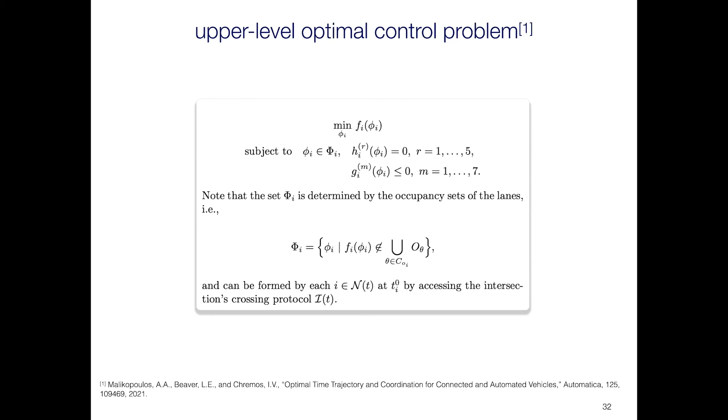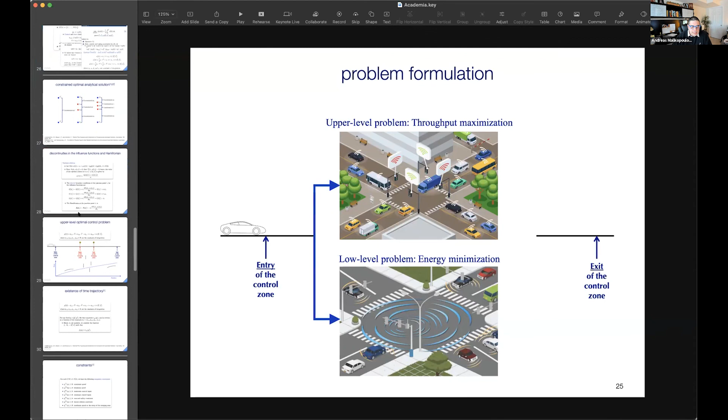Eventually, the problem can be solved in real time, because essentially what you do—let me go back to the concept. I like to use this graph because it explains very nicely how you solve the problem. So essentially, this is the problem.

Essentially, you try to find a polynomial metamodel with a specific form—it's just fitting a curve, that's what you're trying to do. Once you fit this curve and create this time trajectory, you inverse back and you have the solution for both problems. So this is the trick that we did with the Audi, and we were able to solve the problem in real time. However, before you get to that point, you need to make sure that at least from the theoretical perspective, you're doing the right thing. Your problem gives you the capacity to get the solution online and so on. But to get the exact solution, you can definitely find simple numerical methods that can implement it in real time and get your result.